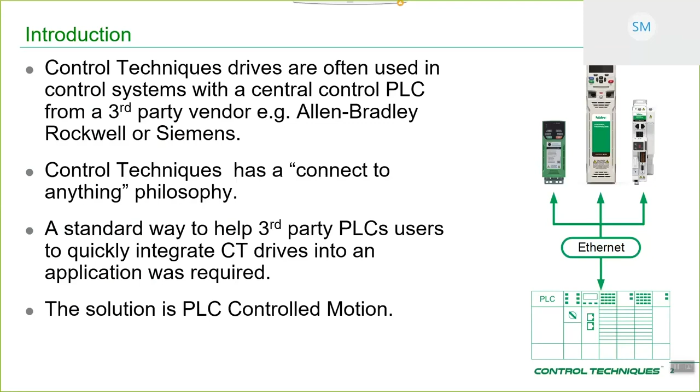Quite often the customer will specify that that's the PLC that they want because they've invested time in training their maintenance staff for how to use that particular environment, so they have no choice. So what we want is to take globally a bigger share of that type of business, and to help us take a share of that business, make it much easier for people to integrate Control Techniques drives into those third-party environments. Okay, so that's the background reason for why we've chosen to centralize and produce PLC Controlled Motion.

So what is PLC Controlled Motion? Well, essentially it splits into three offerings. So we have a plug-in for Connect. As long as you're running version 2.11 of Connect, you can install this plugin. It gives you a nice front end to be able to set up the drive side of the application. So how to set up user units, the motion controller inside of the drive, if that's the motion interface that you've chosen to use.

We've got a comprehensive set of PLC motion interfaces for your given environment. So TIA Portal for Siemens, and RS Logix or Studio 5000 for the Rockwell type environment. And for each of them, no matter which one you're choosing to use, there's full step-by-step documentation. It's screenshots, everything is totally step-by-step. So not only should you guys be able to get going with it, but it should be fairly easy to help your customers to get going with this as well.

So after you've installed the plugin, and we're going to cover the physical installation later, so there's probably about 30 minutes of presentation, and then the rest will be actually showing you how to do this stuff for real. After you've installed, what you'll find is that PLC Controlled Motion appears as something that you can do under the setup menu on the dashboard for the drive that you've added.

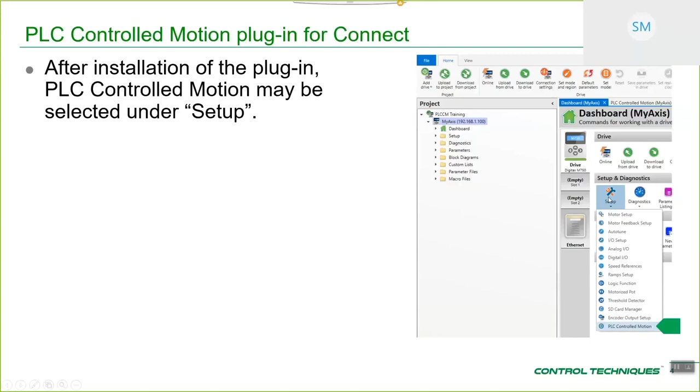Then what you're presented with is the axis configuration. So this tab is all about setting up the main properties of what you're trying to do with your system. So to start off with, you've got to choose your PLC. For the versions that are available, you can choose a Rockwell PLC or a Siemens PLC. In your case, probably it's going to be the Rockwell PLC that you're interested in.

Secondly, you choose the control type. So these are representative of the 5 different motion interfaces that you've got available to you within the PLC side environment. So we've got simple open loop frequency control, closed loop control in RPM, and then these 3 choices at the bottom here are all motion controller related. You have speed control in real engineering units, so that might be millimeters per millisecond, for example. Position control in real engineering units, and EGB for axis following type applications.

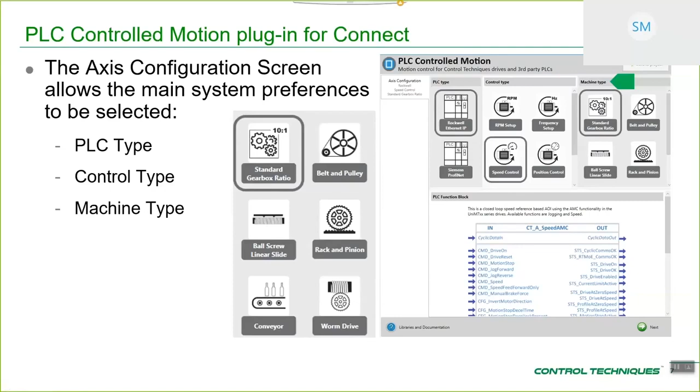So once you've selected that, last of all, you're interested in the types of mechanics that you're connecting to in your machine. So we've got 3 rotary types: standard gearbox ratio, belt and pulley, and worm drive. Those are the rotary mechanical transforms. And then we have the linear transforms: rack and pinion, ball screw or linear slide, and conveyor. So once you've selected whichever mechanical transform is most applicable to your particular machine, you've basically set up the main properties.

One thing to note is that no matter where you are, you'll see this little help icon and libraries and documentation. It's important to remember it doesn't matter where you are in the development process, this is available. When you click it, you get access to the folder structure for all of the documentation. As you can see here, this is a screenshot of the help PDFs for the Rockwell PLC environment, but also you get all of the example PLC code.

So when you come to use the PLC Controlled Motion offering within the PLC environment, you need to go and grab your files, put them somewhere that you can understand and then be able to use from the PLC's perspective, because obviously it's a different environment.

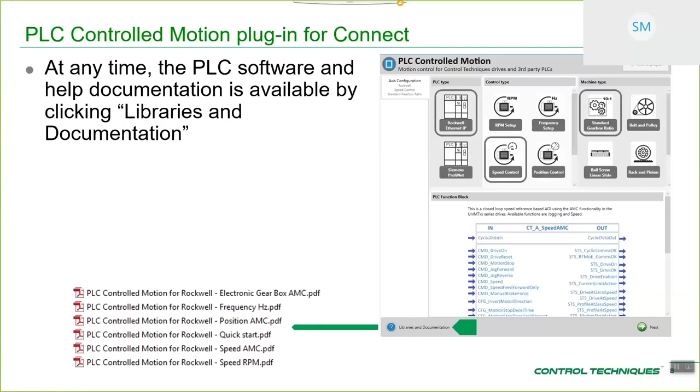So after completing your axis setup, you can see that all these other tabs get formed. On the basis of the configuration that we've got here, we populate all these different tabs. What we've tried to do is organize the tabs in a logical, commissioning type order. First, set up your motor, set up your option modules, set up your encoder, then the mechanical transform, hardware limits, and brake control, so that's both regenerative energy brake and resistor setup and mechanical brake setup.

For the Rockwell environment, you've got 4 dedicated cyclic input mappings and cyclic output mappings, so that you can customize your application and get extra data to the drive and from the drive. Dedicated units tab, RTMoE setup, so we're using RTMoE to send and receive real-time synchronous cyclic encoder data, so that you can do a leader-follower type application. And finally, we apply the setup. So I'm just going to quickly go over each of these.

So motor setup, you've got the ability to choose between one of 2 motor types, because those are the only motor types that we really support for the AC product range. You can either have a servo motor or an induction motor. Regardless of which one you've chosen, you can directly enter the motor nameplate data if you happen to know it, or if it's a Leroy Somer motor for induction machines, or a Control Techniques Dynamics servo motor, you can enter in the model number.

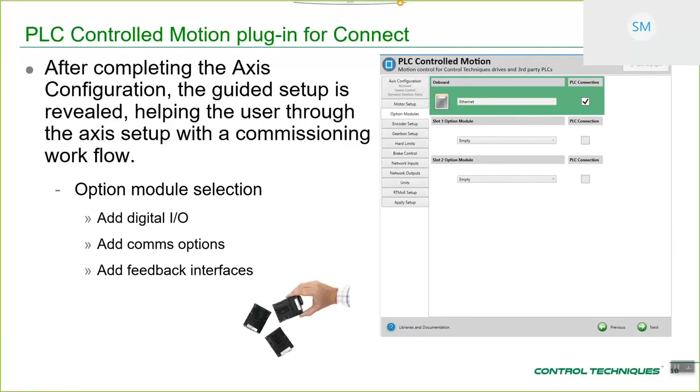Next, you've got encoder setup. Whichever encoders or encoder interfaces you've got fitted to your drive, you configure them here. The one thing to note is that the position loop in this application is always controlled by drive P1. So if, for example, you go to a dual loop configuration here, P1 will still be controlling the position loop, and you'll have a separate encoder to control the speed loop.

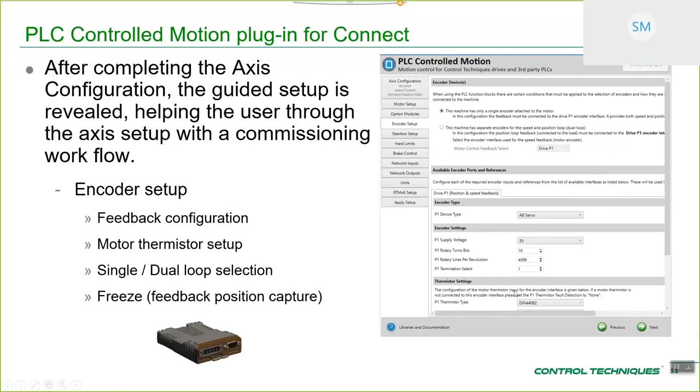You can see in this example, this is just a standard single loop setup, so the position and speed loops are both controlled by the drive P1 encoder interface. You can go through and set up all of the standard options for that, the thermistor setup, and you can set up freeze position capture if you need to.

So machine configuration. Depending on which mechanical transform you've actually chosen, in this case it's a simple gearbox, there are various options that relate specifically to that. So if it's a rotary transform, typically it's just going to be a ratio, and you have a number of different user-friendly ways in which you could enter that ratio. So in this particular screen, it's speed ratio, which is a common way to enter your ratio.

For linear, typically it'll either be a gearbox plus a conversion from units per rev, so units per revolution, or turn pitch, depending on which transform it is that you've chosen.

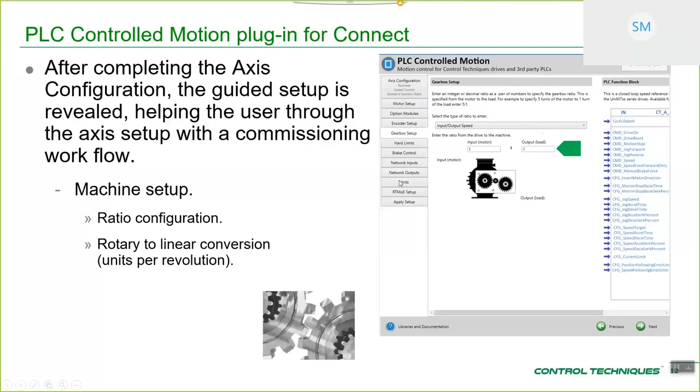Secondly, physically above this section, you've actually got the electrical regenerative energy brake and resistor setup, so you can set up the resistance and the power and the time constant, etc. We'll have a quick look at that later when we're actually using the tool for real.

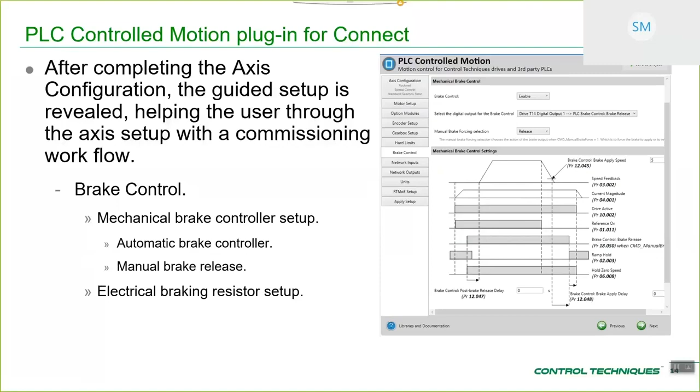Network inputs and outputs. As you can see, what we've done is we've given 4 dedicated inputs and 4 dedicated outputs. It's not that every application can use this, but it could be that for your particular application you want to trigger a particular feature that's outside of the scope of PLC controlled motion, that's not in the standard offering, and you might want to map an input parameter to that or an output parameter to that.

If that's the case, all of your mappings get configured here, and then when you complete the process and apply the setup at the end, all of these additional mappings will be made, and then the array, which is the collection point for the data in the PLC, will possess these values, or that will be where you'll enter in those values at the PLC side.

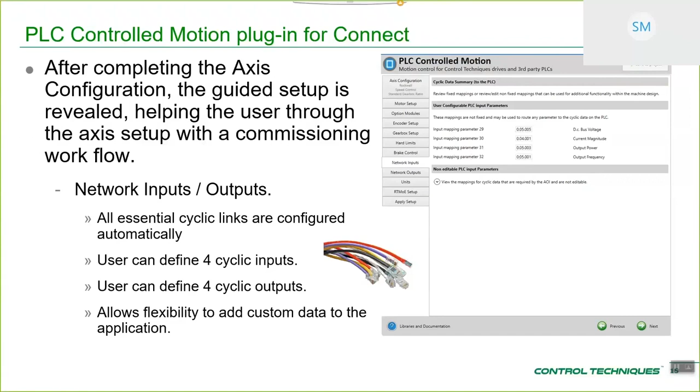Unit configuration. So we've gone to quite a lot of effort with the unit scaling. I know certainly from my experience, I've been teaching motion control to both CT engineers and external customers for a lot of years, and almost everybody falls down at some point on unit calculation, and by that I mean conversion from things like encoder counts to real engineering units, so millimeters per millisecond, or in the US I suppose it would be thou per millisecond or something like that, because it's an imperial system.

But hopefully what you'll see when we get there is that it's pretty logical. If you've got a rotary application, we give you a set of rotary units to be able to select from. You get to choose the resolution of those units. You get to choose the resolution of your feedback with respect to counts in a rev. So if you've got a 16-bit encoder, that'll be 65536 counts per rev, etc. We give you useful information about maximum and minimum operating speeds.

For those of you that are interested, we show the ratios that actually go off to the AMC for AMC-based applications. We also give the ability to set up the overall maximum speed reference that goes to the drive, and also the maximum speed that gets applied to correct position error. And we'll cover all of those setups in more detail later.

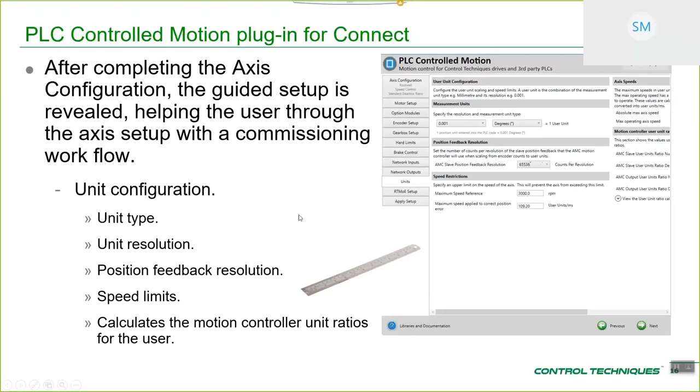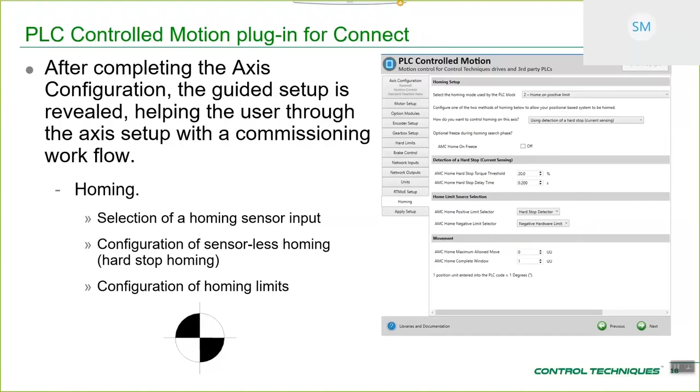So this is the kind of homing that you would do on a linear axis that's actually been designed for the axis to bump the end as a cost saving, so you don't actually have to have like an inductive proxy sensor or something like that to detect the home region. And then last of all, you apply the setup. So download it to the drive, and then perform your auto-tune, and then move over to the PLC.

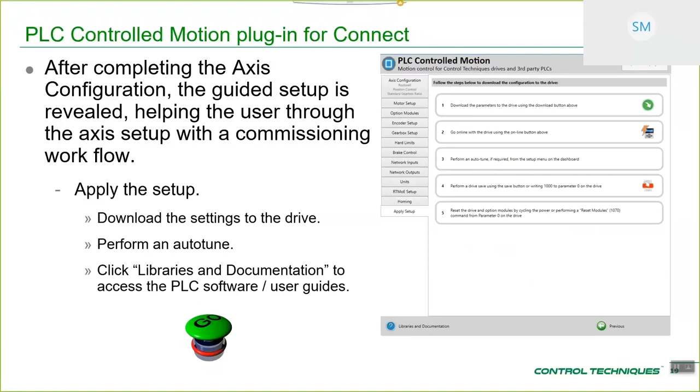So from the PLC side, essentially we have made all of the interfaces in ladder logic where possible. Some of the more complicated functions have been written in structured text, but there's only one or two of those. The vast majority of it is in ladder logic. When we did the assessment of the market, it seemed like most people wanted to use ladder logic, so we'd continue in that vein.

It makes it a lot easier for people that aren't hardcore programmers programming in C#, C++. A lot of the guys that will be using this are maintenance engineer type guys at customer sites, and almost all of that class of user can use ladder logic really easily. So it made sense just to continue in that vein.

So the function blocks themselves, all of these outer function blocks that start with the prefix CTA, they're fully editable. You can go in there, you can edit, you can add, you can customize, you can do what you like, okay? Fully flexible. The core functionality is wrapped up in an inner function block that starts with CTC, okay? So what we've done is we've given you a lot of flexibility to be able to change and modify the interface, but we've kept the core functionality locked up.

Now, when I say locked up, it's visible. So the way that we've set up the AOIs in the Rockwell environment and the function blocks in the Siemens environment is such that you can see all of the code, even in the parts that we don't want you to edit. You just can't edit them. So it's giving you guys and the ultimate end users some ability to fault find through the system if they're trying to chase a problem, which is quite nice. It's an important thing.

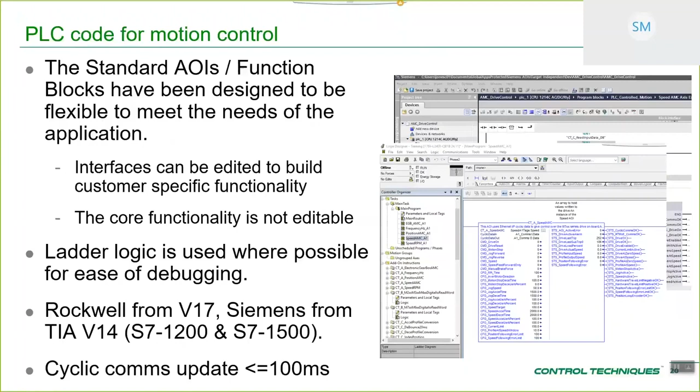So, as we discussed before when we were looking at the tool, we've got 5 main function blocks available, or AOIs, for the Rockwell environment. So we've got frequency, speed in RPM, speed in engineering units, position in engineering units, and electronic gearbox in engineering units. For all of these, regardless of the third-party PLC environment, so Rockwell or Siemens at the moment, example routines are available to get the user going.

Okay, so you haven't got to do all of this from scratch. You haven't got to start off at the basic AOI level. You can import a routine into your program. That's what's depicted here. These are individual get-you-going routines. Same in both environments. So for me personally, I can get an axis going in probably 5 minutes end to end in the Rockwell environment if I wasn't describing it. The Siemens environment, because it's a slightly more complicated environment, adds probably another 5 minutes. So it's usually about 10 minutes end to end for that environment.

So not only have we got the motion interfaces, but we've actually got some supporting functionality as well. So for the Rockwell environment, we've got non-cyclic comms reads and writes. So let's say you have an application and they really wanted to get a lot of extra data from the drive for some reason, and you've run out of your cyclic links. What you can also do is set up non-cyclic comms reads and writes to the drive.

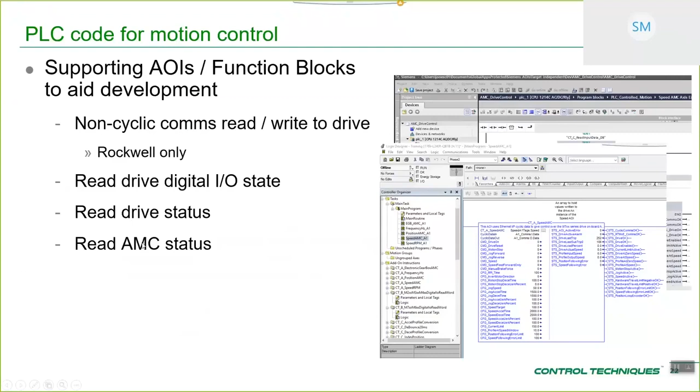So the function blocks themselves, we categorized them with prefixes. The main reason we did this was because in the Rockwell environment, when you go back as far as version 17, it tends to put the AOIs in alphabetical order. So we've got a lot of different AOI names here, and it would intermingle all of the ones that you're intended to use with a lot of the underpinning system blocks that you're not really intended to use. So to get around that and to make it easier for you to use, we

gave them these prefixes. So the first prefix is CTA: all of the primary motion functions, so electronic gearbox, frequency, position, speed, speed in RPM, etc. They have the prefix CTA. Auxiliary functionality, functionality that the user is intended to use, is called CTB, so that's things like your non-cyclic comms, digital I/O read words, etc. And finally, items that are unlikely to be useful to the user but form a part of the motion offering, the building blocks of the system, are given the prefix CTC. Okay, so those are functions that could possibly be useful, but they're not generally intended for the end user to use, basically.

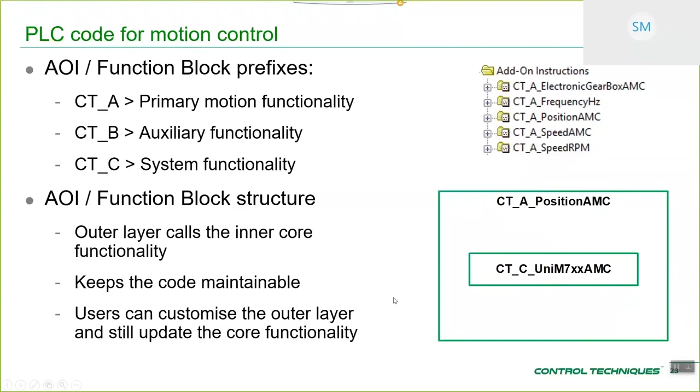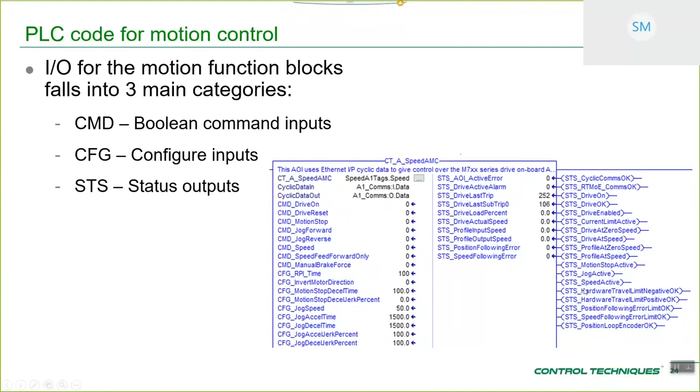So a lot of thought has gone into not only the types of motion that you can have, but your ability to programmatically check and sequence what it is that you'd actually like your machine to do. So we'll just take a brief overview of the different blocks, just so that you can kind of see the functionality that you've got. We're not going to go into too much detail here.

So the open loop frequency block is called CTA frequency. Okay, this block works with the complete Control Techniques AC drive range. So Commander, Digitax HD, and Unidrive M, because all of those drives support open loop operation. Okay, so because it's a relatively simple method of operation, you haven't got massive numbers of references here. So this is more your kind of general purpose type market.

So you've got a dedicated motion stop, so dedicated stopping reference, dedicated jogging reference for manual control. So a guy sat there with a button pack manually jogging his machine along. And finally, a running reference for automated control, so more programmatic speed, frequency control.

So moving on, we move to CTA speed RPM. This is essentially a very, very similar interface, only it's now closed loop, which obviously means that you can't control a Commander drive with it. So you're now limited to Digitax HD and Unidrive M series because those support closed loop speed operation. So all of the same references again, only now in closed speed loop.

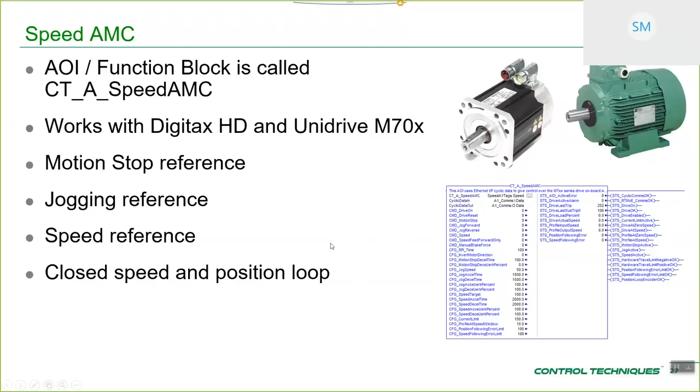There's little difference between this and the previous one. The only difference is now you're working in engineering units and you're closing the position loop. So as you can see, we're progressively becoming more complex interfaces for more complex applications.

Then position interface, so this is CTA position AMC for Digitax HD and Unidrive M70X. It's got motion stop reference, jogging reference, homing, because now we're considering position. Okay, so we want to be able to home our axis, and we've got 10 selectable position references. So those 10 position references could either be absolute or they could be relative.

Each of the individual indexes have their own profile. So position set point 1 has its own acceleration, deceleration, and so does position 2, etc. And again, closed speed and position loop.

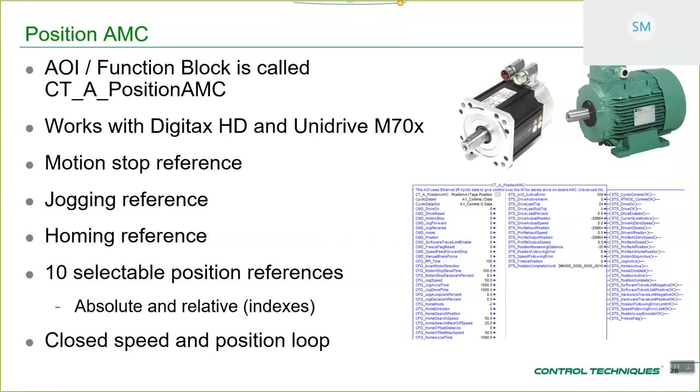Last of all, CTA electronic gearbox. Again, Digitax HD and Unidrive M. Motion stop reference, jogging, homing, a single position reference this time because we recognize that you're probably going to want to be able to home and then possibly move your axis to a dedicated starting position before you form your electronic gearbox lock. And then the EGB reference, so electronic gearbox locking reference to form your digital lock with PLC selectable position master encoder over RTMOE.

So essentially, for those of you that are familiar with RTMOE, you have a link number with RTMOE. What you're setting at the PLC interface is which of those RTMOE link numbers you're choosing to subscribe to from the slave or follower. And again, closed speed and position loop.

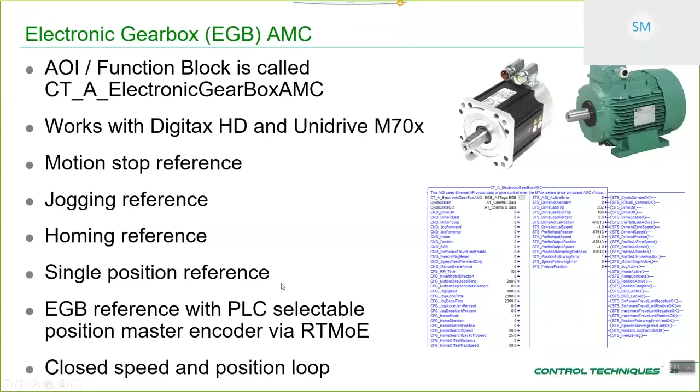So this is essentially the end of the presentation section. I just want to highlight some of the benefits that you get with the system that we've got on offer. Okay. So firstly, it's significantly reduced integration times. If you went to a system of the past and you tried to individually set up cyclic links to manage the AMC, for example, or to manage the drive, there are a significant number of challenges involved with that. This reduces all of those and gives you a nice common interface that's well documented and means that you can get motion going very quickly rather than having to spend hours individually mapping cyclic links. So it's a massive saving in time.

Second thing is that with a relatively low spec PLC, so the PLC that I'll do the second part of this presentation with is an L24ER CompactLogix. It's one of the cheaper end of the PLCs, yet with this PLC I can still manage and control an electronic line shaft type system, so a digital locking system. So it means your customer doesn't necessarily have to buy one of the top-end Rockwell PLCs and pay the license fee for the Rockwell Motion plugins. They can get that going with standard EtherNet/IP. They don't need CIP Motion, and get a nice system going for less. Only one network is required, just a standard Ethernet connection, so it keeps it simple.

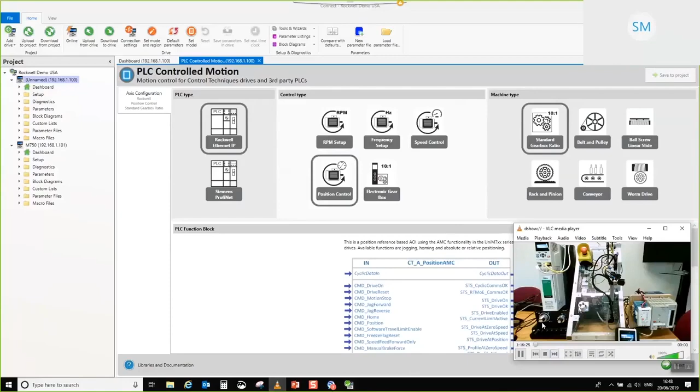So PLC type, Rockwell. I'm going to choose position, and I'm going to keep it in standard gearbox ratio because, you know, if I put this back on again, as you can see, there's no mechanics on the end of this. There's kind of no benefit really with going for anything special on that front. And then I'll click next.

Okay, so we need to go and set up our motors. Okay, so he is a 067 EDA, and it is a 3000 RPM one. I'm going to highlight that. What you note is once I've clicked it, it's fully populated the motor nameplate. Okay, so there's no extra steps to be done for that. I'll click next.

So for this application, it's dead simple. It's hello world. We don't actually need to add any extra options, but if you do, click the down arrow, and then you've got a bunch of different options down here depending on what it is that you want to do for your application. Click next.

So for this particular application, we are going to be doing a single loop application. If you want to, you can do dual loop. You can see that when we go to dual loop, I'm just going to temporarily set it up for now. You can see at the moment we've only got two encoder interfaces, so we've got drive P1, drive P2. You can independently set those up, but the key thing to note here is that drive P1 is always for the position feedback and it's labeled as such. Drive P2 is now for the speed feedback.

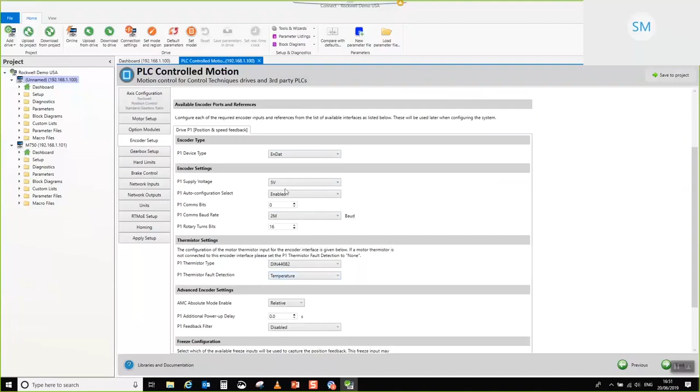So let's move on. So in this case, our encoder is an EnDat. It's 5 volt. Let's increase the baud rate for it. We don't actually need to set any of the comms bits or anything like that for this. I mean, I happen to know that this particular encoder is 18, and this one is really 0. When you power on, because you've got auto configuration on, it will actually set it up for you.

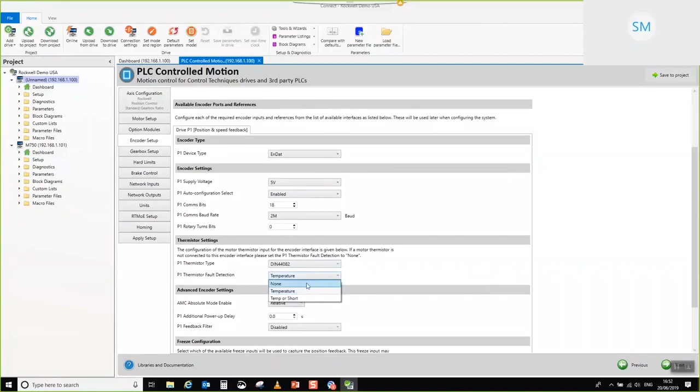Other thing of note is that for these Unidrive M750 demo rigs, the thermistor is not actually connected in them. So what you want to do is go ahead and set P1 thermistor fault detection to none. Okay. So you can see when we scroll down, we've got a few other settings. So we've got the ability to choose whether we want to use the absolute or relative information from our encoder. For older encoders, we've got the ability to set up a power-up delay.

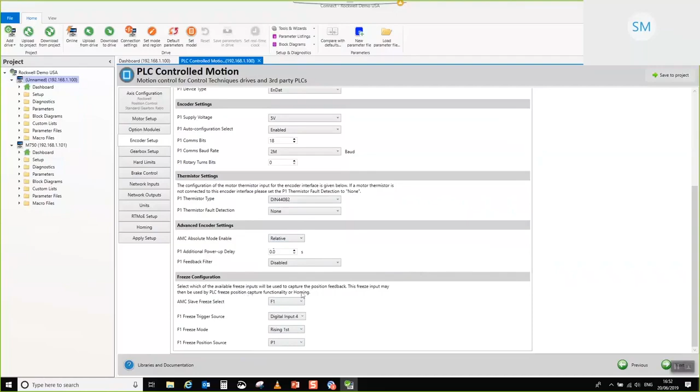So something called Hiperface encoders from the past, some of the really old ones tend to have quite a long power-up time to initialize. And we've also got the ability to set up freeze configuration. So if you're doing home to a freeze, or you're just simply doing freeze position capture for the main axis that you're trying to control, this is where you'd go and configure that setup. Okay. There's nothing more to do on that page. We'll move on. So gearbox setup.

So before, you've got a few different ways in which you can specify it: input speed to output speed, revs in, revs out, tooth ratio. So if you've been in the situation that I've been in, certainly in the past on site, where nobody really knows anything about the gearbox and you've got to try and work it out, and the only way that you've got really is to individually count the teeth inside of the gearbox, you can enter in tooth ratio if you want to.

Other thing of note is that although you're presented with integer values here to enter in your gearbox ratio, you are not restricted to integer values by any stretch of the imagination. The values behind here are 64-bit floating point, so that means that you've got down to 15 decimal places to enter. So I can do something like 1.23456 and

1.987654, and at the end of it, the special math that's inside of the units tab will resolve this to a 32-bit integer numerator and denominator to set up the scaling for the motion controller, and it'll all be handled for you. Okay. For this particular instance, I'm just going to set them to 1 to 1 because we don't really have anything, and there's not really much value in setting them to something else.

So, hardware limits. If you note that sometimes I've been clicking next and sometimes I've been clicking the tabs, it's perfectly okay to use whichever method you like. It won't make any difference. So this is where you set up your hardware limits. You can choose where you'd like those to go from. I'm going to choose these two. Sorry, there you go. Use those two. We're not actually going to use them in this application, but it's more just to show the principle of the thing and how you set them up.

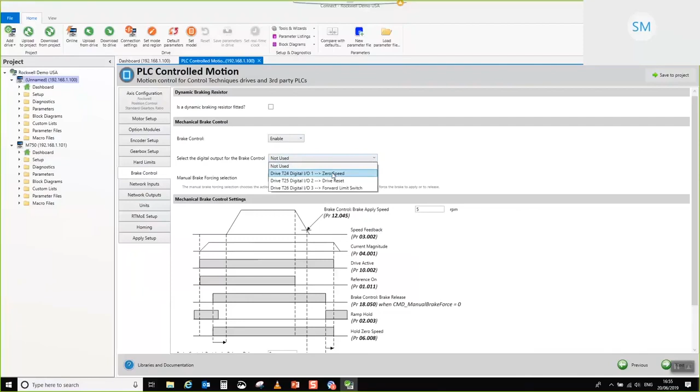Mechanical brake control. You've got all of the main features that you can set up: delay on brake release, delay on brake apply, etc. One thing you really need to know is that this is the place where you actually set the digital output that you're going to use to physically control probably an interface relay to control the solenoid that physically controls the mechanical brake. So let's set it to that one. You can see that it's nicely labelled PLC control brake release. So when you're looking through the parameter list later, you can see which one has been assigned.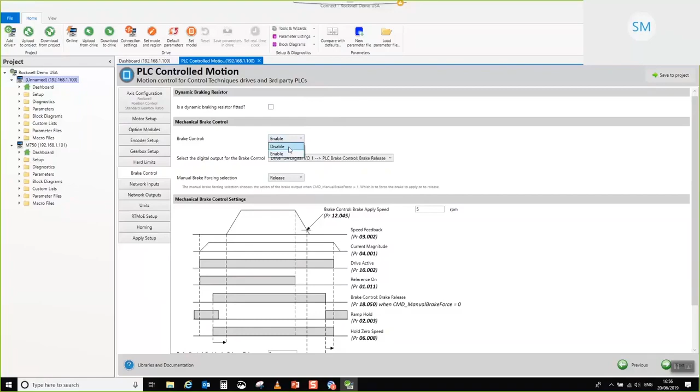But a secondary feature for more maintenance control type applications is that you have the ability to force the brake. So you can force it to apply, that's lock the motor, or you can force it to release the motor, and you can command it from the PLC code. It's probably a bit difficult for you guys to see, but this says command manual brake force. So for maintenance type operation, the maintenance guys can, assuming that they've set up their mechanics in such a way that it's safe to do so, trigger this and force release the brake to perform some maintenance activity. We haven't got any of that on this, so I'm going to choose to disable, just for illustration.

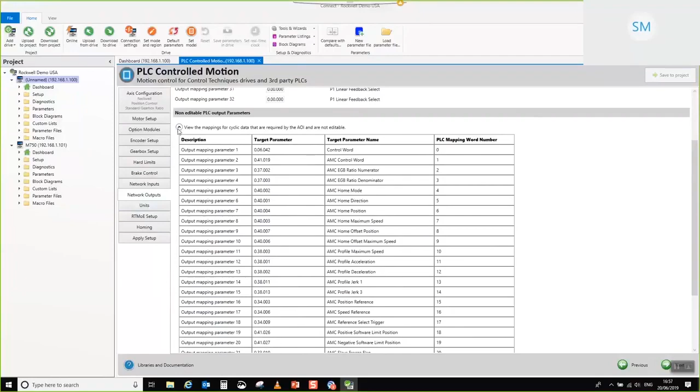So here's our input and output mapping, so we can choose to set that to something. There we go. You've got exactly the same thing for the outputs. I'm not going to spend too much time. Out of interest, all of the other cyclic mappings that are fixed are listed beneath this collapse control. So if you're interested to know which ones are actually being used by the application, you can take a look. But they're collapsed under this control to save confusion, just to present the user with the things that they are actually going to use to make their application work.

So Units tab. As you can see, we chose standard gearbox ratio back here. So what we have is a set of rotary type units, because standard gearbox ratio is a rotary kind of mechanical transform. In my case, I'm going to stick with degrees, but because 360 degrees in a rev is pretty coarse resolution, I'm going to choose an extra couple of decimal places. Okay.

The other thing that we can do, if we wanted to, is actually increase the resolution, because the particular encoder that's actually attached to this machine is an 18-bit encoder, so I could go all the way to 262,144 encoder counts per rev if I wanted to. Okay. To keep things simple, I'm going to stick with 65536 counts per rev for the position feedback.

So the first thing that you're interested in is, if I take this back to 1, you'll note that you get this information box. What this information box is telling you is that, firstly, your ratio has either a very low resolution, so a very high granularity; 360 increments in one rev is very high granularity. It could also tell you that you've tried to get more resolution than is really available from your encoder, so you've overscaled it.

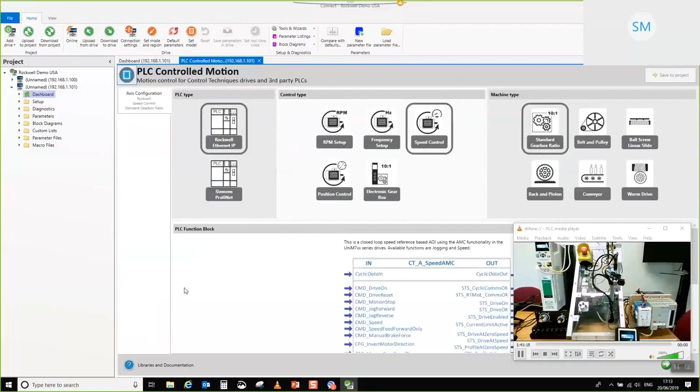So I'm just going to fire the dashboard for the M750. So let's begin. Oh, actually, sorry for this one. I need to upload from the drive because what I need to do is actually make the offline project capture the Ethernet settings, our IP address, etc. Begin the PLC Controlled Motion section. So I'm just going to turn off the video feed for the application for now. There we go. Right. So Rockwell again.

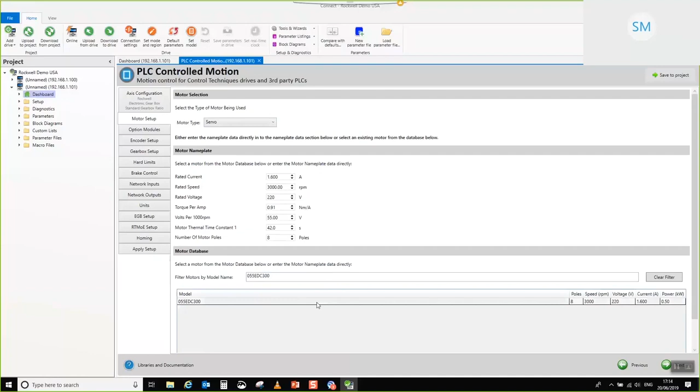Give me 1 second. Yeah, that's the one. Right. So there we go. So that's gone, updated its details there. So we'll click next. No need to add any option modules for this because it's already got all of the options that it needs.

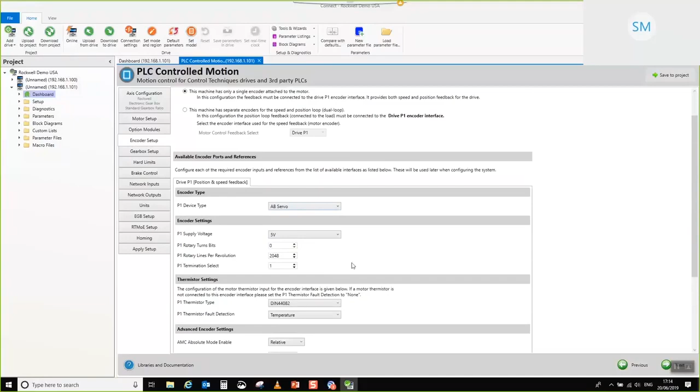In this case, it's AB servo and it's a 2048 PPR encoder. Doesn't really have any concept of turns, so we'll get rid of that. Nothing else to do for that one. So nothing to do for the gearbox because we're going to stick with a 1-to-1. I'll stick some limits in here. Brake control, don't need to change any of these. Go back to units, so we'll stick with the same units. There we go.

Menu, so it's 1125 over 2048. 1125, 2048. There we go. So you've also got the ability to invert the reference if you want to, and you've also got the ability to change the EGB locking bands to suit. I mean, normally these will be kind of okay, but if you've got a particularly low resolution encoder that you're attempting to follow, you may actually need to increase these values to account for the low resolution encoder essentially.

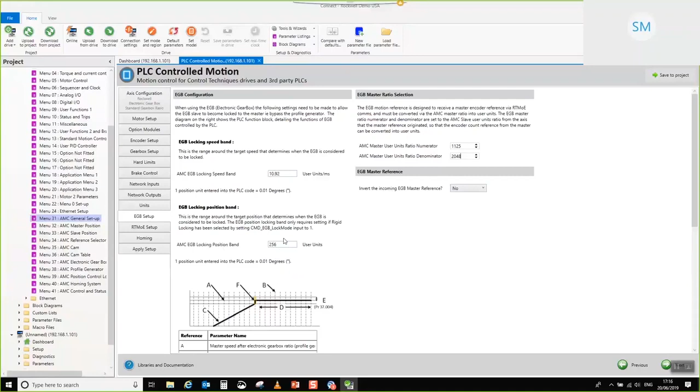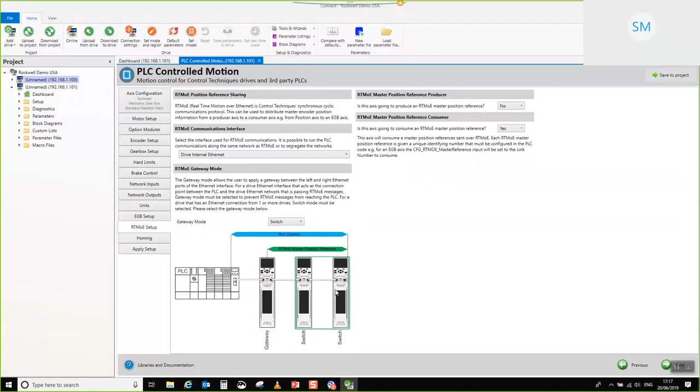So move on to the RTMOE setup. Drive internal Ethernet is okay for this one, and we're going to consume the reference that we were transmitting from the Unidrive M700, which is in position mode. So I'm going to go and set that up and say yes. And because this particular drive is downstream from the drive that's at the head of the network, we'll leave it in switch mode, so all of the data gets passed through, including the VLAN packet. So you actually have to have this in switch mode in order that the RTMOE synchronous cyclic comms actually get passed down. Okay, so there's nothing to set there.

We'll leave this at homing in current position, and then we'll go to apply setup. So let me just make sure that the drive is selected, which it is, and then I'm going to choose to download to the drive. Okay, so I've done that, and then we can go on to perform the auto tune. Select auto tune. I'm going to go online. There we go. So select rotating auto tune again. Let me just put the video feedback on again. There we go.

And in this case, it's this big E-stop button. So as you can see, it's just slowly rotating, doing the auto-tune again. This will be about another 20 seconds or so till it completes. There we go. So let's just stop that. We'll save the parameters.

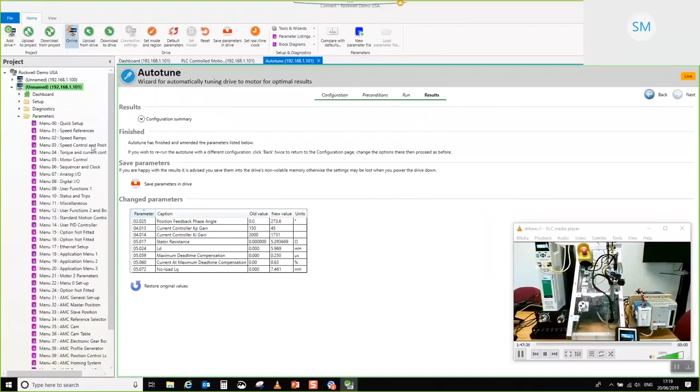Then parameter setup for this. I'm going to set a little bit of current loop filter in here again. So where are we? 12. Let's go and set that up. Make it nice and quiet because it's a relatively low resolution encoder on that one. It's only a 2048 PPR encoder, so we don't want it being too noisy for the recording.

And then last of all, we want to go and reset its communications interface. So we need to go to the Ethernet setup and click reset. Okay. So we'll probably lose comms for a second whilst that happens. So there we go. So that drive is now configured, and you can see because I didn't spend too much time talking about it, it was relatively quick. Last of all, I am going to upload from that drive. And there we go. That's that done.

So, next phase, let's go and create the PLC project. So, I'm just going to go and start my Studio 5000. So I'll just make a new project. This one, and then I will call it Rockwell Demo USA. There we go. Okay, next. And my particular PLC happens to be running 24, so I'm going to go and configure that particular version of the Rockwell environment. And we'll give it a couple of moments to start. Takes a little while whilst it initializes the first project. Nearly there.

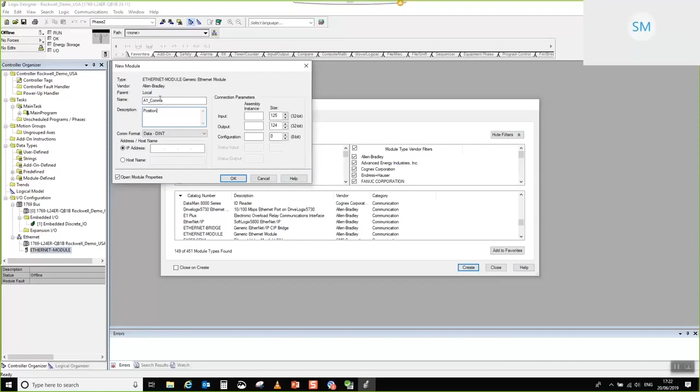Now, the reason why you start off with A1 comms to begin with is simply because all of the example routines that we'll put into our PLC environment in a minute, they all start off with that. So it's very helpful for you to start off with A1 underscore comms. That way, the first example that you do will automatically be hooked up. You haven't actually got to do too much to it.

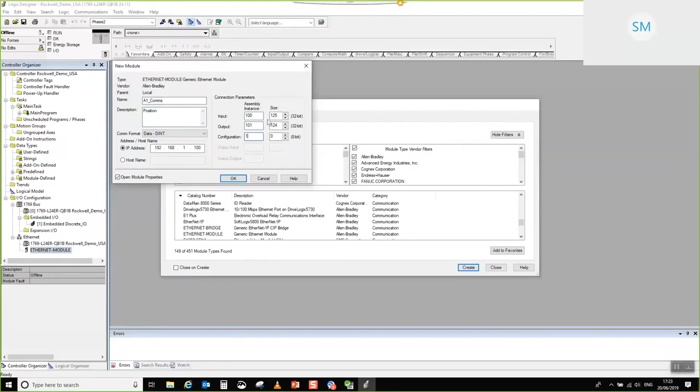Okay. So we're going to stick in our IP address. So 192.168.1.100. We need to set up our assembly instances. So the input one is 100. Output 1 is 101. Don't worry about remembering any of this, because the step-by-step instructions that come in the manuals for this detail all of this. So you haven't got to write anything down. It's all good. So 32 ins, 32 outs. There we go. That's the end of that configuration.

I'm quite happy to leave it at the default RPI of 10 milliseconds. That's fine. And there we go. That's the communications interface sorted out. So now the PLC knows about the interface to our drive. So let's go for the next part. So we want to add our example routine. I do recommend that all of you start off with the example routines, okay, until you get used to the system and how to manipulate the AOIs.

So I'm going to select import routine. And because it's a position axis, I am going to import them. What I will do is I'll show you the full path so you can kind of see where it exists. Okay, so C drive, program data. Bear in mind also for those of you that haven't chosen to expose hidden files and folders, you may have to go to your control panel and show hidden files or folders, or to show you the other way to find it, if you come back into PLC Controlled Motion and then you click on this, this will actually take you out to the folder system. So depending on which way that you want to go, whichever works for you.

Okay, so I'll go back to this. So I go add import routine. This is already actually in the correct place for me, but I'll go longhand. So program data, control techniques, connect, extensions, PLC Controlled Motion, documentation and PLC code, Rockwell, because Rockwell PLC is what we're doing, and AOI routine templates. Okay, and I'll select position. So that's going to go and import all of the AOIs that are required to make the system work.

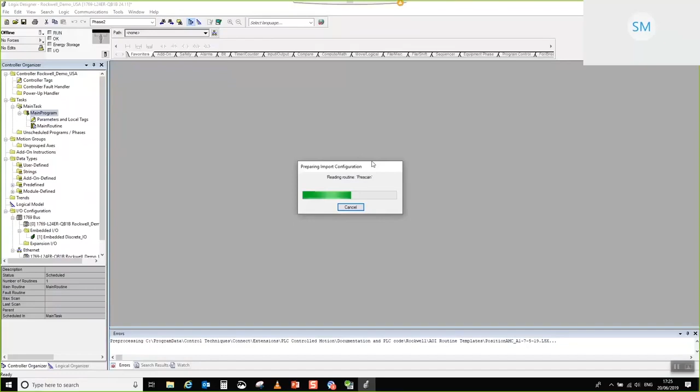It's quite helpful because the way that Rockwell have set up their system is such that any sub AOIs that go to form like an outer AOI all get pulled in as a result of you dragging in, for example, a parent AOI or a parent routine. So it's quite a nice feature of their system. There we go. When this screen appears, just click OK, and then that will go and add all of the AOIs that it has just extracted from that compound file that we clicked before. That to import.

And there we go. You can see all of the additional AOIs have all been added to the project. So I'm just going to collapse all of those. I don't really need to see all those. The main thing to note is that the main motion one is this guy, and these other ones down here that are all marked CTC, these are like underpinning things that go to make up this main AOI. I'll collapse that for now because we don't need to see that.

So I'm just going to open up our example routine just to give you a sort of look around it. What you can see is that most of the motion inputs are defined by move statements. Okay, the reason why we do this is because we've found in the past that basically you try to go and set up default values, and sometimes they work and sometimes they don't. So essentially we force them all the time with a move.

So that when you try to do your Hello World application, you're just trying to jog the axis and try to get some motion, but commanded by the PLC, you've got a fairly sensible value in there that will cause the axis to move. Now obviously, once you've actually got going, you can just go and delete all of these rungs and then start editing directly at the motion interface. So where are we?

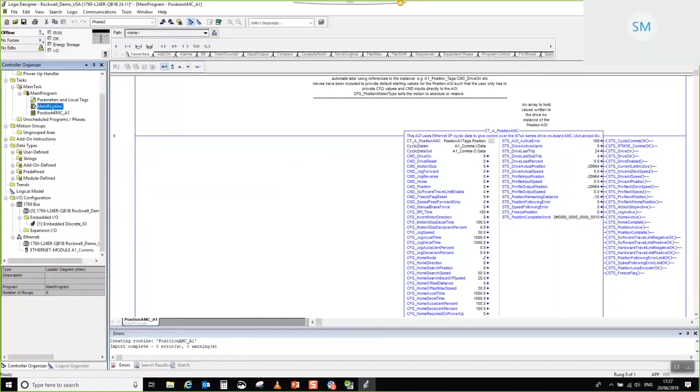So the next thing that we've got to do is actually we need to service this. Okay, so what we need to do is go to program control and call jump subroutine. So I'm going to go and add one of those, and then I'm going to go and add in our example routine. Now the reason why everything has A1 on the end is A1 is for axis 1, axis 2, axis 3. Feel free to name it to whatever you like afterwards. It's just so that you understand the reason why it kind of is everywhere.

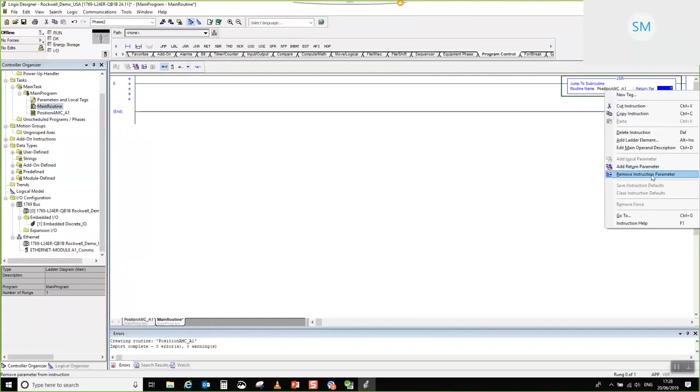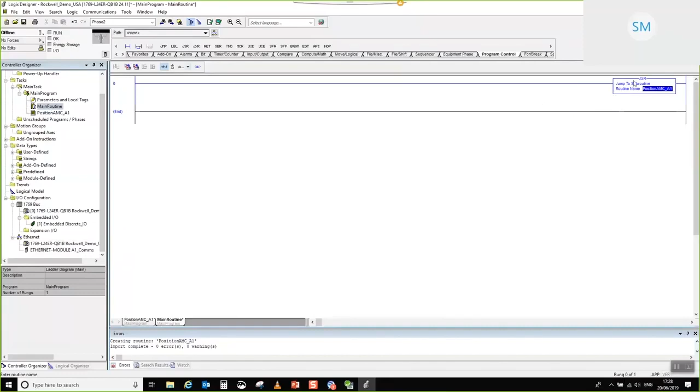And then I'm going to go and remove all of these unnecessary instruction parameters because I don't want to service those. There we go. So essentially, we're now at the point where the comms is connected, the example routine is in. We're now servicing our example routine in our main operating routine.

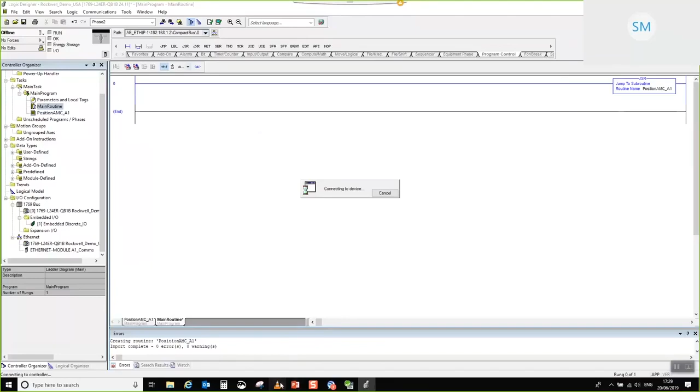The last thing to do is actually to tell the project about our particular PLC. Now, the assumption is that your users know how to set these things up. They know about their PLCs, so I'm not going to go into setting up the path to the PLC. I'm just going to choose set project path because my setup already happens to know that. And I'm going to go online. Just going to reintroduce the video feed whilst that's going on. There we go. So I'm just going to choose to download this. Download.

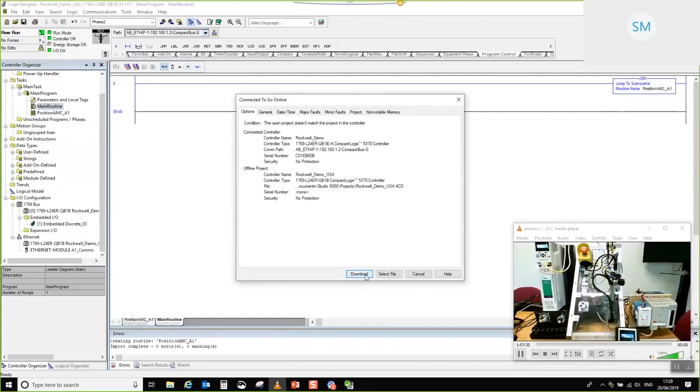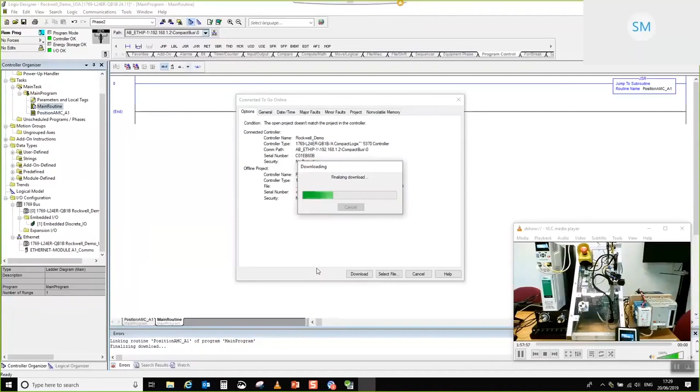What you may sometimes find is if your PLC has already had an established link with the drive before, you may get an Ethernet IP timeout during download, just because you've essentially lost the link from the PLC for a moment. It's not an issue, it's just a fact of the PLC dropping its comms for a moment whilst the download takes place. There we go. See, I've got one because my PLC already previously had a program running. There we go. So I'm just going to go and reset that.

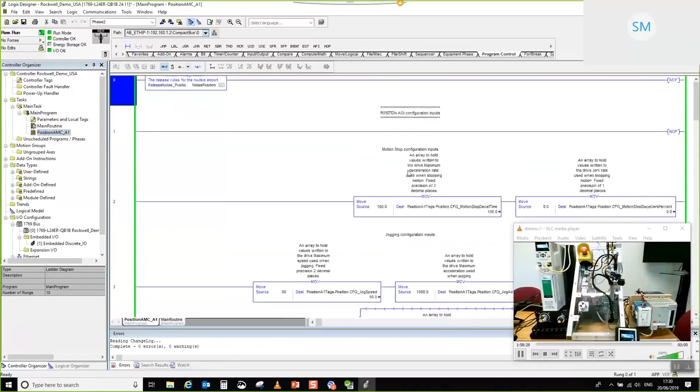And what you can see is that our comms is working. You can see by this green line that the routine is being serviced, which is good. Let's go into our example. Shall I just shut that just for a second? Scroll down, and here's our interface.

Okay, so when you're starting up the axis for the first time, the things that you're interested in is status cyclic comms. This particular output is green, so it means it's set, indicating that you haven't got an error. You want to make sure that you have no AOI active errors, so that's telling you that you've got no input or output kind of problems to be able to control it. As you can see, this is 0, so that's okay.

Now, because we are doing an RTMoE application, it's also worth noting that the status of the RTMoE connection from the perspective of the M700 is shown here as well, so we know that our synchronous cyclic comms are actually working. Important to know.

What I tend to do is, before I kind of get going, if I just hover my mouse there so that you can see, I tend to toggle the STO on the drive. Okay, so what you can see is me toggling the switch, and you can see drive enable coming on and off, and that's a fairly good indication that not only is your comms up, but you've got real-time changes happening at your PLC block. So that's what I tend to do.

So first thing, we want to command drive on in order to be able to command some motion. So let's go ahead and do that. Now, I don't know whether you can hear over the audio feed, probably not, but I can hear that my drive is enabled. You can actually see some of these feedback values moving about. So not that I need to do it particularly, but I'll just choose to execute a home now.

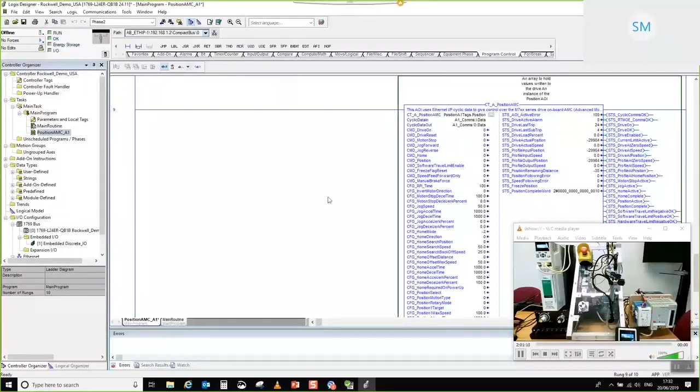Okay, so that's about as far as I'm going to go in terms of programming something, because we simply haven't got the time to do anything more complicated. So what I'm going to do is I'm going to turn this drive off for just a second. There we go. I'm going to go offline, and now we're going to go and configure the second Axis. Okay, so I'm going to go offline. I'm just going to shut the video feed down for a second because we don't need that.

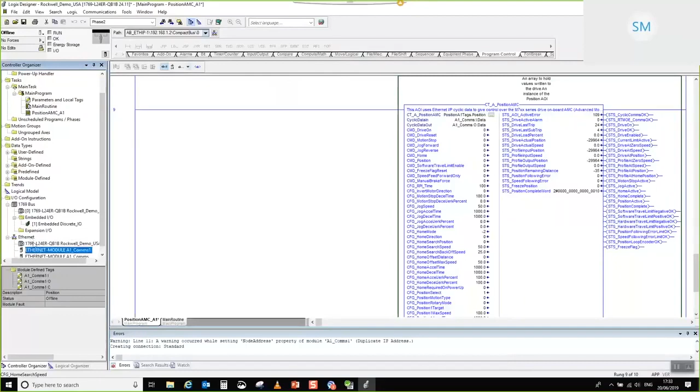So what I'm going to do, we need to copy the comms interface, so I'm going to copy that. So I'm just using Control-C. I'm going to go and paste that on top of there. So we've got our new instance of comms interface, and then I am going to go into the properties of that comms interface, and I'm going to go and rename it. So I'm going to go and rename that A2, and we'll name that EGB because that's what it's doing.

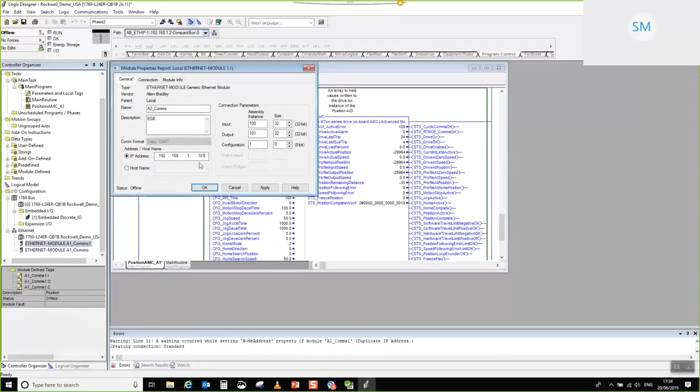You can see that once you've actually made this and you copy and paste it, all of the assembly instance and size and all of that kind of stuff is already set up for you. So you really only have to do it once the first time that you make the project. In fact, you wouldn't even have to do that if you copied an entire Rockwell program for yourselves if you wanted to do that. So I'm going to enter in its IP address. So in our case, it was 192.168.1.101. And I'm going to apply that. There we go. And that's done.

So next thing is I'm going to go and import the example routine for that. So I'll just minimize that guy for a second, and then we'll go and add that. So add import routine. So in this case, I am going to be adding the EGB routine, okay, because we're going to form a digital gearbox, electronic gearbox lock. So I'm going to click OK on that. Just wait for that to go and add.

And what you will notice when you add the second one, because this particular routine import does contain some of the same names, you'll get a few of these warnings saying about a name collision. Don't worry about that, just click OK. What will happen is that anything that's a collision, it will just choose to use the original one, and since all of the routines and all of the underpinning AOIs actually use all of the same source ones, it's okay. So click OK with that.

So what you can see now is that essentially all we've done is really add CT_A, electronic gearbox, AMC. Okay. There we go, and we've got a couple of release notes in here. So for those of you that are interested in any updates or anything, the release notes are actually embedded into the example releases themselves. I have to go in here, don't I? There we go.

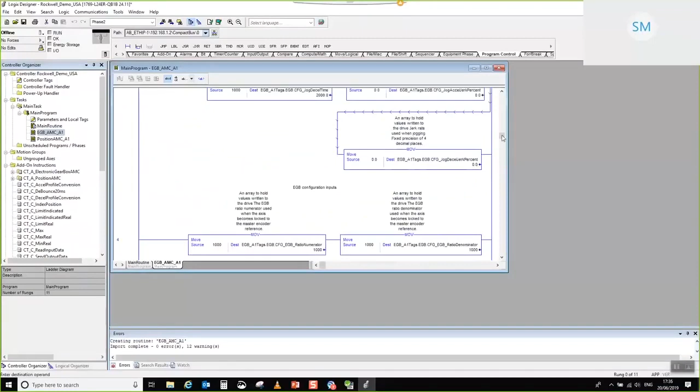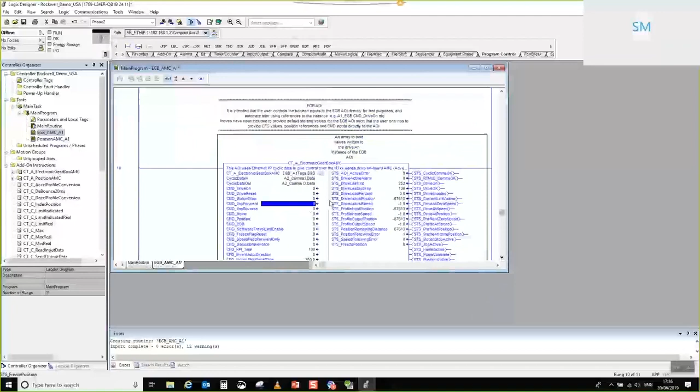Right, so first of all, we need to go and reassign the comms. Okay, so this one will be directed to A1 because that's the one that we direct to by default, but we want to go to A2. So I've done that one. Bear in mind, all of these steps are documented in the step-by-step documentation with it, so that's all that you have to do. So now this instance of AOI is now linked up to our comms interface down here. That's all that's required.

So next thing, we need to go and service this instance. So I'm just going to go ahead and do that. So we need to go to main routine, and I'm just going to go and copy and paste this, and then I'll choose to service it second. I don't think it makes any difference. Bear in mind, in all ladder editors, it tends to work left to right, up to down as a priority.

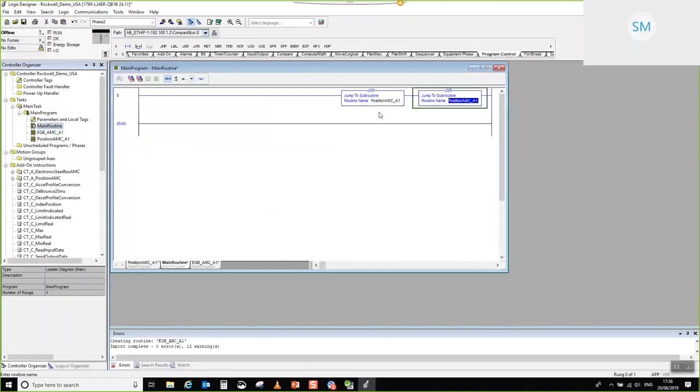So in my case, not for any particular reason, I'm just going to choose to service the EGB second. You could do it the other way around if you wanted to, but there's no way to execute both of them at the same time. You have to choose one first and then the other. So that's what I've chosen. That's it. So that's about all that you need.

Let's just do a quick check just to make sure that that's okay. There we go. That is okay. Good. So I'm just going to go online. And I'm going to download. Let's just give that a moment to download to the PLC.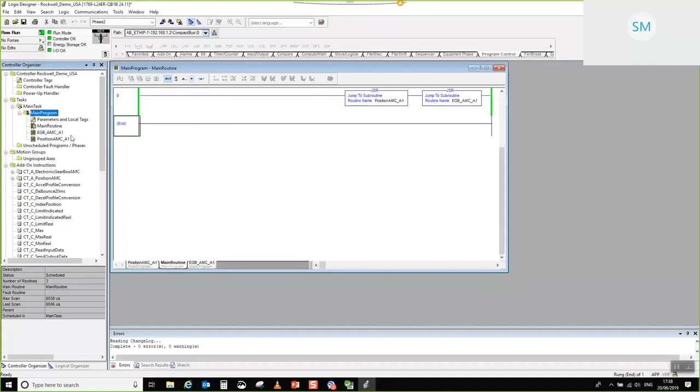Okay. Yep. There we go. So what we can see is that we've got our comms up, as indicated by this guy up here. We can see that both routines are being serviced, as indicated by this green line here. We've got no extra kind of warning information. So let's go ahead and have a look inside of the EGB.

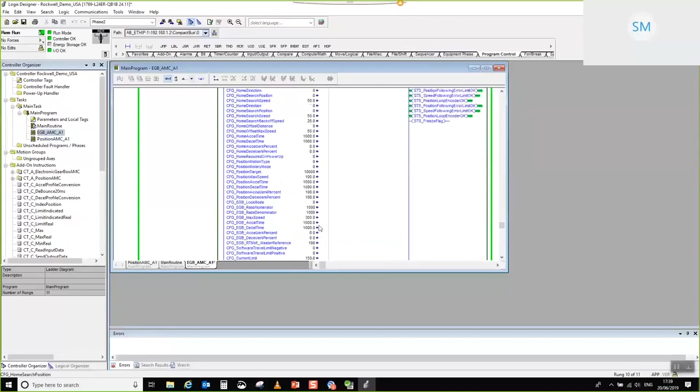So what we can see to begin with is that our cyclic comms are okay, which is great, but we can't see our RTMoE comms okay, and probably the reason for that is that the default link number, which is here, you can see that it's set to 0. So let's go ahead and set that to 100. There we go. So there we go, and you can see now that I've configured the link number to actually receive the master data from M700, you can see that this is now indicating that it's now receiving that synchronous cyclic data.

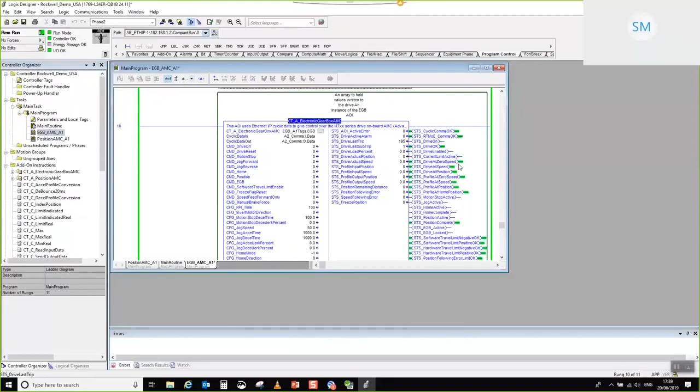Okay, so next thing, as I said before, hold on, let me just turn back on the video feed so you can see what I'm doing. There we go, right, so I'm going to go and release this e-stop button, which happens to be controlling the enable. It's not a kind of power off type e-stop in this case, it's just simply controlling the STO. And as you can see here, the drive enabled, if I turn that guy off and on, it's being controlled. Video feed's a little bit behind, I think it's a couple of seconds or so, but you can see me doing that, which is good.

Okay, so now we're at the point where we're ready to indicate that we'd like the drive to start. So I can hear that my drive is engaged. I can feel that I've got some servo control at the output of the shaft, which is nice. And then I am going to choose to jog forward. So let's do that. And there we go, you can see the axis is jogging. So there we go, that's phase 1. So if I turn that off, there we go, so the axis has stopped.

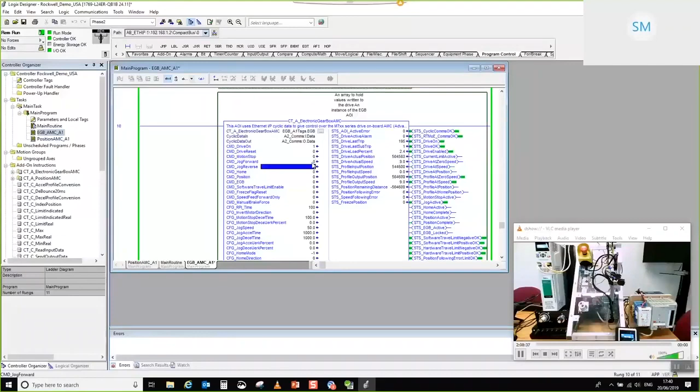So what I'm going to do is I'm actually going to go and open up our position. And just for the purposes of the demonstration, I'm just going to ask this axis to jog. Okay, so I'm going to command drive on. I can hear that my drive is turned on, and I'm going to ask it to jog. So what you can see in the video feed is that axis is jogging. Happy days. So that's the motion reference that we're going to follow. Obviously, if you're going to do a real application, you'd be following something a bit more interesting than just a jog reference. But for the purposes of this demonstration, I think it shows the point.

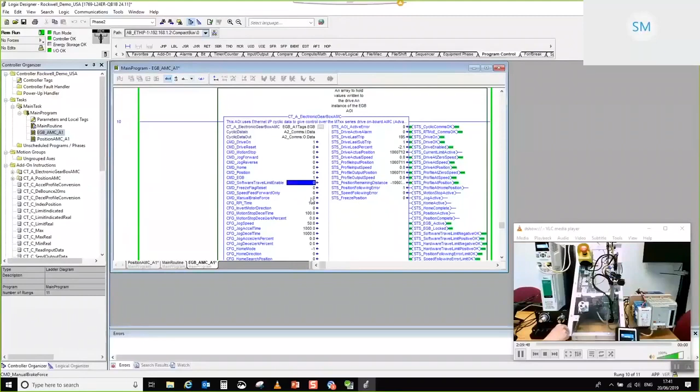So what I'm going to do is go back to the EGB axis. And then in my EGB axis, I am going to command the EGB to engage. There you go. What you should be able to see now is that these two axes are following each other. Now, if I do something nasty to it, like disable this, so what I just did then was disable the master. You can see that both have stopped, so it's showing you that it really is a digital lock between the two. So I've just gone and re-enabled it, and both axes are going. It really is as simple as that.

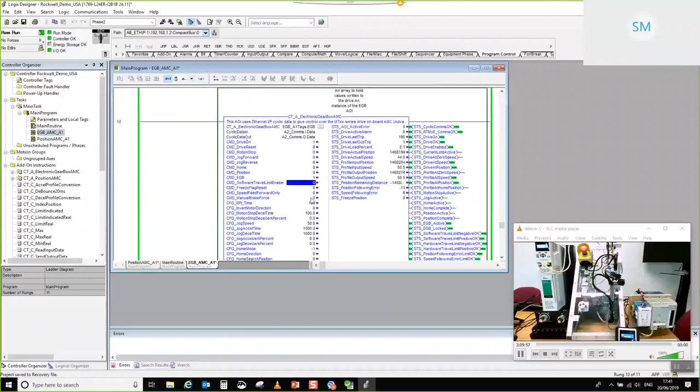So I think for me that kind of concludes probably the most demonstration I can do in the time that we've got available. Clearly you can see that there's a lot of effort that's gone in behind the scenes to document all of this and make all of these systems work in a cohesive way, in a way that hopefully enables you and your users to be able to use this in a simple way. So for me, that's the end of the presentation.

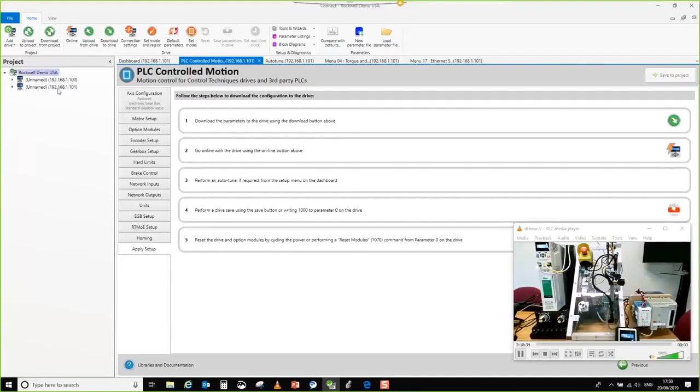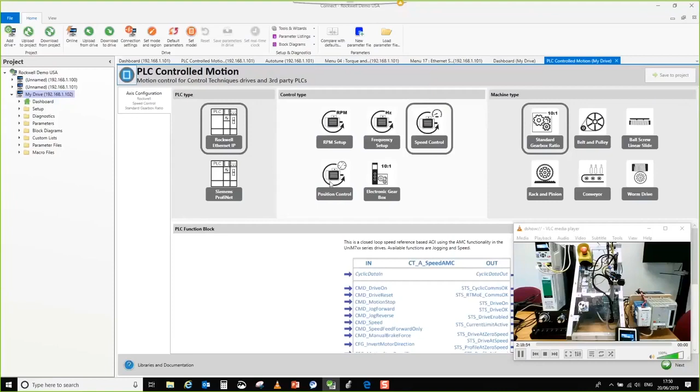Well, I'll tell you what, let's just add a drive. I'm not going to go through the full setup. So what are you doing? Are you doing a Unidrive M? Yeah, 700. Okay, let's stick one of those in, and then we can follow. PLC Controlled Motion. If you're doing dual loop, you must be in one of these three. Yeah, do position control. Okay. Position. Oh, and what transform?

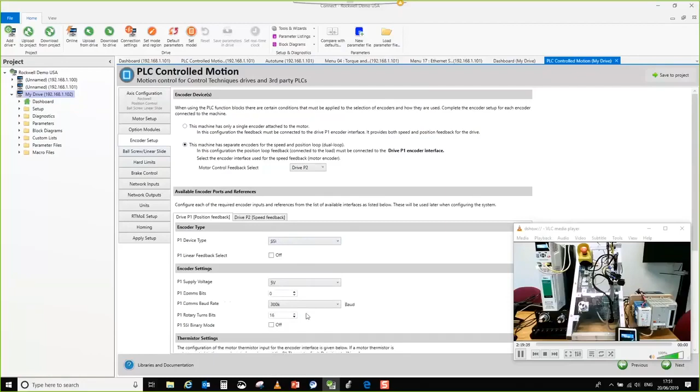It's actually ball screw linear slide. Okay. So for the purposes of what we're trying to do, we won't bother changing any of that because it doesn't matter. We'll go to dual loop. So we'll say that it's an AB for the purposes of this, and the position feedback is, say, SSI. In all honesty, it doesn't really make that much difference which one you've gone with. We can put it in if you want. SSI. No, it won't make any difference.

Okay, so what's your turn pitch? Of the screw, put 667 in there. Okay, and that'll be millimeters? Yeah, millimeters. Okay. That's fine. So we'll go to units, select millimeter units. We will give ourselves some kind of chance of achieving that. There we go. That's a pretty even ratio, which will work quite nicely.

So what you can see here is that you've got two sets of ratio set up. You can see for this particular transform, you haven't got any ability to add a kind of output gearbox. So for your application, presumably you have got an output gearbox, which is why you're having that kind of problem. Is that correct? Yeah. That's correct. All right.

So let's go and choose a mechanical transform that's both linear and has a gearbox. So if we just choose conveyor, I know it's not the correct name, but it has the kind of properties that you're interested in. What was it, 667 or something like that? Yep. We're going to choose millimeters, and then you are saying it's 50-to-1, is that correct? Yeah. Well, this will be close enough. Okay. So that's fine.

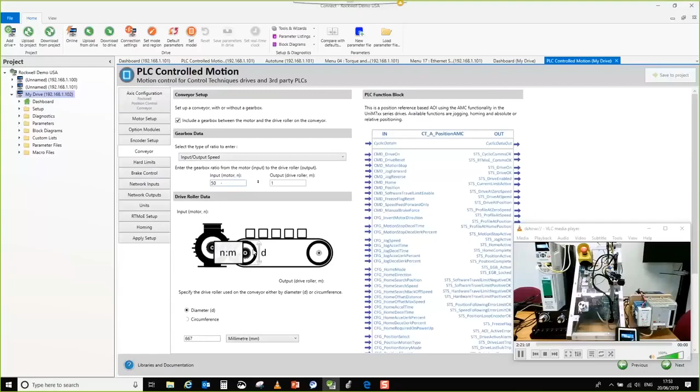The transform is motor, 50-to-1 gearbox, so that you got torque improvement to whatever the output load is. Yep. So then we go down to units. I think all of this is kind of correct. See, that puts them differently. Yeah, that puts the ratio in, but that's what I'm saying. If you've got an output gearbox and you're doing dual loop with a ratio in between, you have to choose the conveyor type in order for it to calculate it correctly. Otherwise, there's basically nowhere for you to set the output ratio.

Okay. That's where I was getting lost then. No, don't worry. It's good that you've asked the question, because a lot of people do dual loop and it can get a little bit complicated. But if you know that you have to use conveyor if you want to do a transform that is linear plus a gearbox ratio, this is the only way to do it at the moment.

I can say that for not the next version that we're pushing out, because the next version that we're pushing out, 1.5, has a load of ease of use features. So the idea is that 142, the version that you're looking at, actually this is 144, so this is the Siemens and Rockwell version. The version that you guys are officially releasing in the US is 142, so it's Rockwell only. I'm choosing to show you the full version, which you can have for early adopters if you're interested.

In the version that's coming, things like the 10% that you leave for speed applied to correct position, that will just be automatically calculated for you based upon this value here. The feedback resolution will automatically be calculated for you based upon the encoder setup that you've chosen. The maximum speed reference here will be automatically set. So there's loads of things that we can automatically do for the user to make it easier for them.

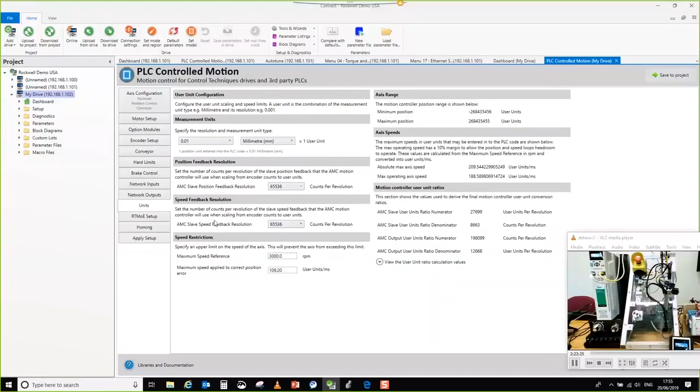So instead of having a conveyor, if I come back to this particular mechanical transform, you've got the ability to set up a gearbox, but it could be that in your practical application, that's made out of a belt and pulley and a gearbox and some other ratio. Do you know what I mean? There could be quite a few ratios in there. So you'll be able to build a machine out of up to 5 different ratios and plug them together in a pictorial type editor, and then choose the final mechanical transform at the end, whether it's rotary or linear or whatever. But for the moment, this is the interface that you've got to do that kind of thing.

You should probably think about how they did it in MCS with the PLC Open on there. They did a nice job with it. They actually have a tab called Dual Loop on there where you can set that up. Sure. Well, in this case, the dual loop part of it, you're kind of hidden from it in the background. As long as you understand what your ratio is, the tool actually goes and sets all of the rest of it up for you. So you don't need to know how to configure this and set 326 and all of those other pieces. It does it for you.

Hi. This is Fitz. That makes sense, I appreciate it. Sorry, I just have a really quick question, more of a curiosity thing. Since we're talking dual loop, to date I've always used the P1 as my speed and my P2 as my position. What's the reasoning for picking to do it the other way?